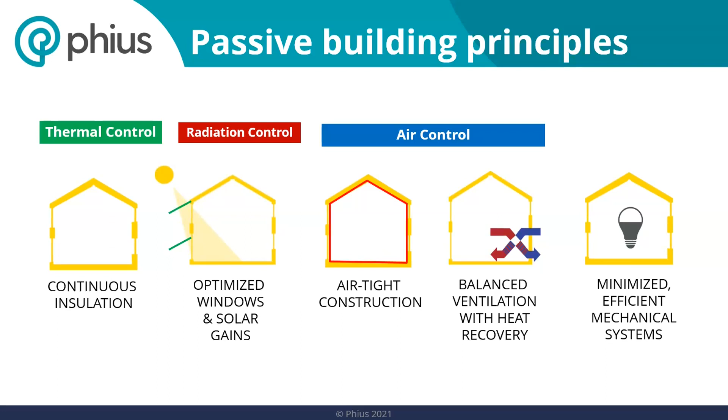So besides the quantitative pieces of passive building, which include energy reduction and those types of things that are going to help save money for the building and for the developer and for the people living in it, we also have some qualitative pieces. So comfort, interior health, safety, durability, resilience, all of these things are also delivered with our passive building standard as part of making our projects more energy efficient.

These are kind of the things that are less often talked about, a little bit harder to quantify, but very real things that are delivered to occupants. So going into our certification requirements, we have them split into two halves here. I've got it listing the passive conservation metrics and then the active conservation metrics. And there's a few of them listed here that I'm going to go through piece by piece to wrap everybody's heads around what we're talking about.

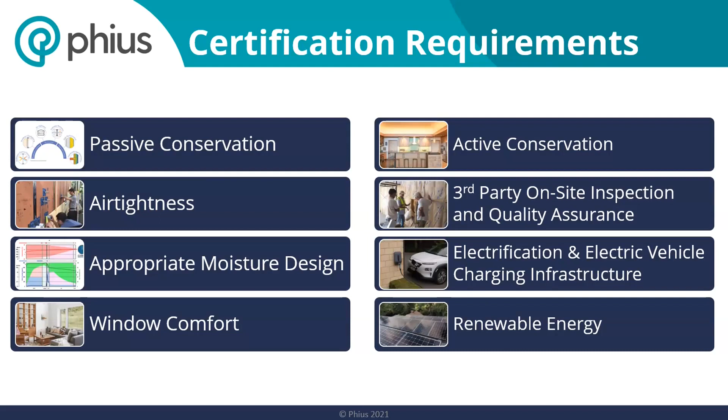So from a passive conservation perspective, we have heating and cooling limits that have been optimized for cost, energy use, climate, building type, occupant density, dwelling unit density, and we have a specific calculator that we use to determine what these targets should be.

And again, because they're optimized for all of these different pieces, we really feel like we have developed a standard that's really special and really works well, especially for the North American market, and it responds to not only the building type, so if it's a multifamily or a single family building, it also responds to occupant density and dwelling unit density.

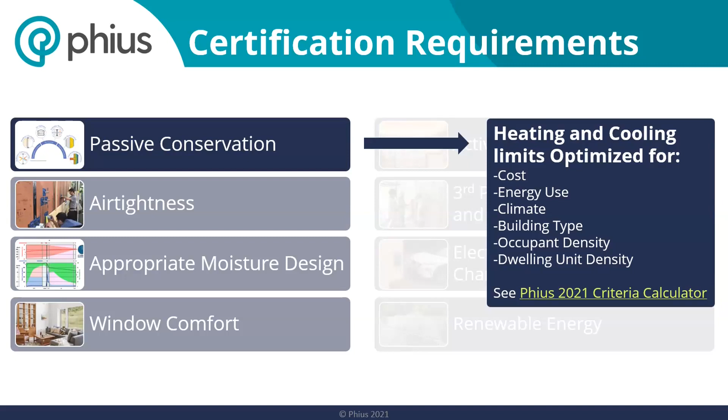So it's trying to take a look at some of these projects, which a typical market rate multifamily building could have a spread of studios, one bedroom, two bedroom, three bedroom apartments. That type of building might have a little bit different feel than maybe an affordable project that's all studios, where it's even more densely populated. So these optimized heating and cooling limits are our main metric through the passive conservation metrics that help inform how much insulation you need, how good of windows you need, et cetera.

Air tightness and moisture design, keeping those in line are critical for both building durability and occupant comfort. We have specific air tightness requirements that are tested on site and have to be met for our final certification process. And then moisture design is all about keeping the assemblies durable over the long lifespan of the building, not introducing moisture into the walls, making sure these buildings and their assemblies last as long as possible.

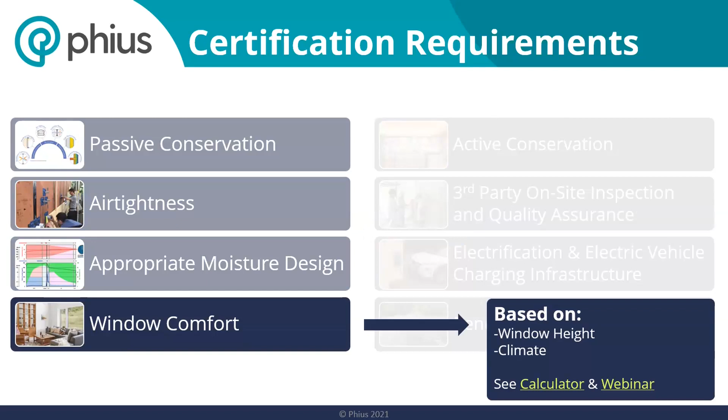Window comfort is part of the comfort criteria we have. It's based on window height and climate. So depending on where the building's located, we're looking at the ASHRAE 99% design temperature, and then how tall that window is informs this limit. So it's basically a maximum U value, or the window can be only so bad depending on the climate and the window height. So again, this is going back to one of our qualitative pieces that we've assigned a quantitative limit to, which is window comfort.

Our active conservation metrics are limiting the source energy of the project, or how much energy the building uses overall. For multifamily buildings, it's based on occupant density and dwelling unit density. And our calculator that I mentioned earlier also determines what this target should be. I'll talk a little bit later. We have two different certification paths. We have PHIUS Core and PHIUS Zero, which I'll go into a little bit more in depth about what this means in terms of the source energy limit.

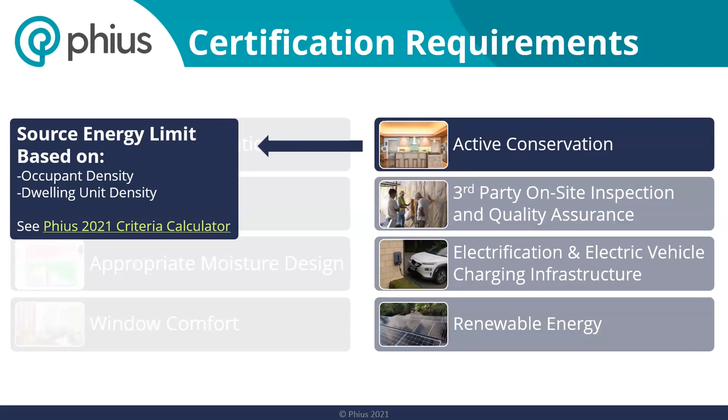Third-party on-site inspection and quality assurance is a really important piece of our certification process. We're relying on prerequisite programs like Energy Star, Indoor airPLUS, and Zero Energy Ready Homes to build off of some of the things that they've already developed, so that we didn't have to reinvent the wheel on these pieces that we find are very important to ensure the buildings perform well, and the on-site inspection and quality assurance is really designed to make sure that the owner, the developer, whoever's building the project is getting what they paid for.

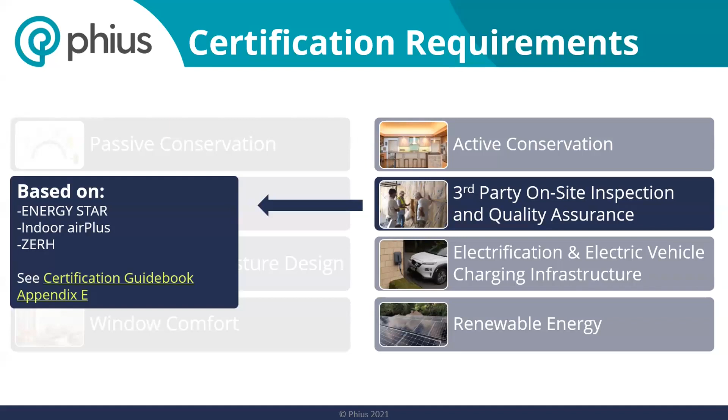So our certification guidebook has a reference here to all of these prerequisite programs and how we build on those with our program.

Electrification and electric vehicle charging infrastructure are two pieces that we've added to the PHIUS 2021 standard, which is our newest and most current iteration. We're basically trying to get as many buildings ready to be electrified as possible. So if you're doing any kind of fossil fuel combustion equipment, you are required to introduce panel space for an electric version of that equipment in the future.

And where there is parking planned, we require electric vehicle charging infrastructure to be either ready or available at some point in the future. So we're not requiring these things up front, but we do want to plan for the future. And those are definitely pieces that I think will be important with making our buildings last longer and making them more valuable over their lifespan.

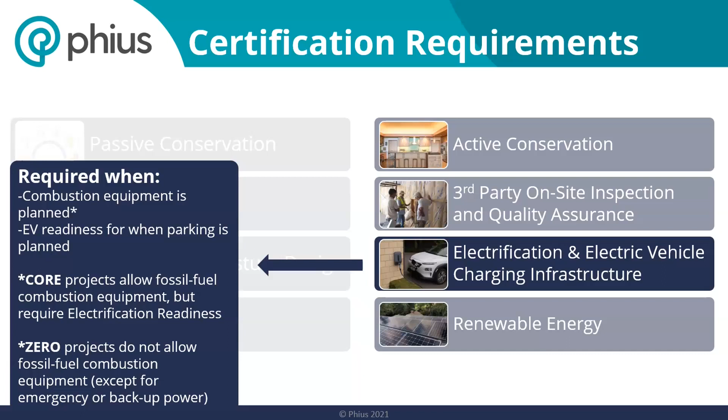The last piece is renewable energy, which kind of ties into all of these other parts that we've looked at. So we do allow renewable energy to help offset the active conservation and help meet the source energy target for our projects. We have a few options available for renewable energy. So we're looking at on-site PV or on-site renewables directly on the building or the site.

Looking at directly owned offsite, there's community solar options, virtual power purchase agreements, and then renewable energy certificates. All of these are options that we look to try and help not only the buildings perform better, but incentivize the grid to get cleaner as well.

So getting started, early on, we're looking at building a team, looking at the paths and the requirements. We kind of covered the requirements already. So from our perspective and the teams we're looking at creating, first and foremost would be a PHIUS certified consultant or a CPHC. They're really highly recommended. You want to involve this individual early. They take care of the energy modeling. They can help inform the design decisions, and they're our primary contact when the project is going through certification.

A PHIUS certified builder is also highly recommended. They're not a required piece of the puzzle, but if you can find a builder who is familiar and understands the goals of the project, they're going to be a really invaluable asset to the building and the success of the project. They help maintain quality and oversight and really ensure that the documentation provided is going to actually get built on site as it's expected to.

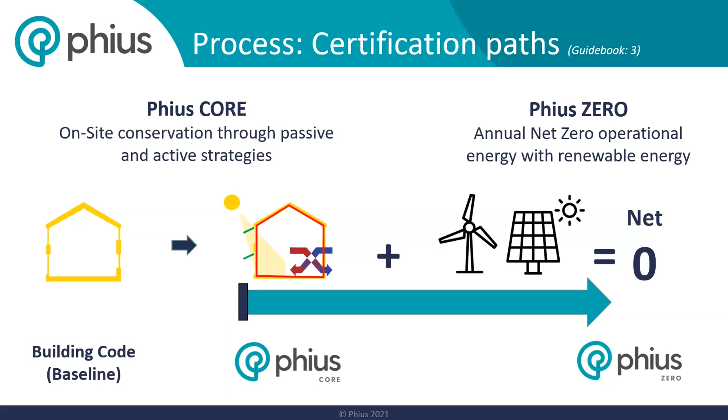The next stage I'm going to look at is a little bit more about the certification process in general. It is a two-part process. So we have design certification, which happens while the project is being designed. We look at an energy model to verify compliance that is reviewed by certification staff. And this process is iterative.

We're looking at and trying to help the project team develop the project throughout design development and construction documents. This isn't a process that we necessarily want to see after construction documents have been completed, because at that stage, if there are any issues with the certification design or anything like that, it's really difficult to change those types of things.

So we typically like to see projects earlier in design and then have the project teams check in with us and have us review their projects as it's being designed, rather than kind of a Hail Mary at the end and hoping that, okay, at the end, I hope we're going to pass.

The second half of the certification process is final certification. So this is the on-site quality assurance done by the verifier. PHIUS reviews their documentation, and then we align the energy model that was approved during design certification with any as-built changes that might have been made. So if we changed out an insulation type or stuff like that, we're going to pull in the actual blower door test results. We're going to see the actual ventilation values from the commissioning of the ventilation system. All of these pieces get reviewed and absorbed into the final energy model, and then final certification is issued after that.

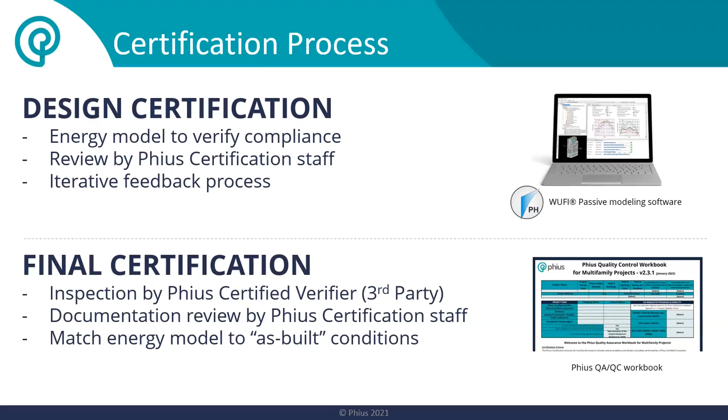So our process, we really like to recommend, it's an optional stage, but starting out with a feasibility study to determine if certification is worth it for the project. If you're in one of the communities in Massachusetts that's adopting the opt-in stretch code, this is something that definitely is worth doing. There are incentives for feasibility studies that they're providing. And this is basically PHIUS's snapshot check to help the project team, especially early in design, to see if certification is going to be indeed a path that seems reasonable and is worth it for them.

We create a preliminary energy model for your building design used to assess the current design, its feasibility to meet our performance targets. We try to keep these relatively inexpensive and try and have a turnaround time that's reasonably quick, so the project teams can make decisions early in the process. It includes an energy model. We've got preliminary reports about the annual energy use, and we typically create two cases when we're doing our feasibility studies through PHIUS. We have a baseline case, which would be looking at a code compliant version of the building, and then looking at, okay, what would it take in terms of improved R values, improved U values, better air tightness, et cetera, to meet the PHIUS targets.

And we always end these feasibility studies with a 1-hour call to kind of go through with the project team if there are any questions, going over what next steps might be, and then generally reviewing the findings that were done during the feasibility study itself.

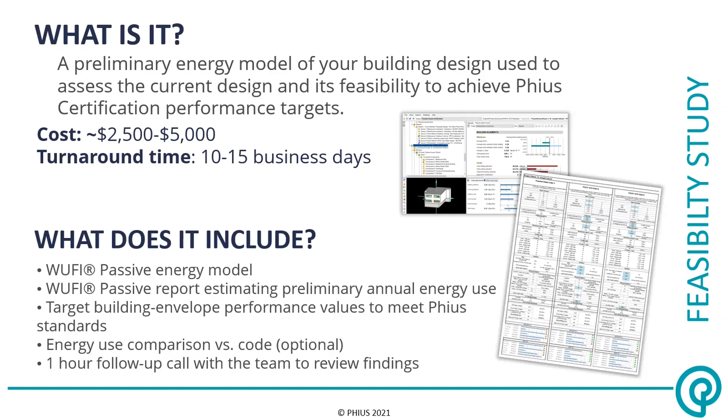Assuming that feasibility study went well and the project team wants to move forward, the next phase is paperwork and just getting the project registered. So this is a quote and contract request from our submit a project page. And the project is considered registered after the invoice is paid and the contract is signed. At that point, the project will be listed as registered on the PHIUS website. And you can move into actually the certification process, which is the design reviews, which I mentioned earlier.

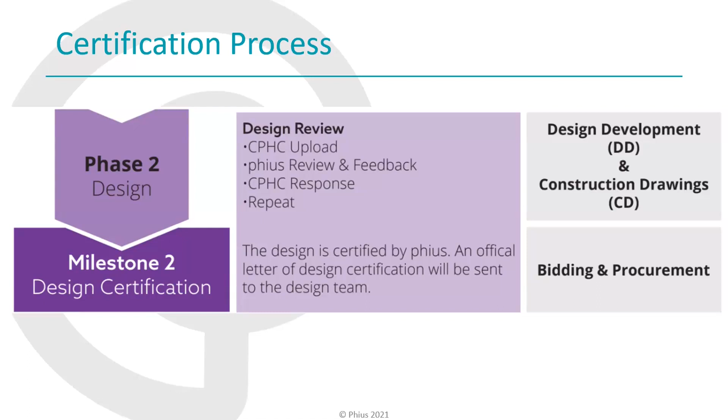So this part is where I'm going to go into a little bit more about what this iterative process might look like, what the things we require, some of them specific for multifamily. But in general, we're looking for the certified passive house consultant to work with PHIUS, upload documentation for us to review. PHIUS reviews and provides feedback. The CPHC reviews the feedback, makes any changes requested, gives more clarification and information, and then rinse and repeat until the project has been lined up and all of the documentation, the drawings, the submittals align with the energy model that was provided and is meeting the targets. After that point, design certification is issued by PHIUS, and an official letter is provided, and the website is updated to include a design certification date shown for that specific project.

So a little bit more about this design certification. We'll look at an overview of the documentation we look at. So compliance tool or the energy model, looking at the drawings, takeoffs, and submittals, talk about a few supplemental tools, and then we'll touch briefly on the PHIUS feedback form, which is the end all be all and basically where we track changes, where we track additional pieces of information that either need clarification or more info.

The pieces that build off of and we check against this energy model are drawings and takeoffs. So design drawings, obviously these typically come from the architect and the engineers. We need to see building plans, sections, elevations. We want to see mechanical, electrical, plumbing drawings, all of these things that make a building come together.

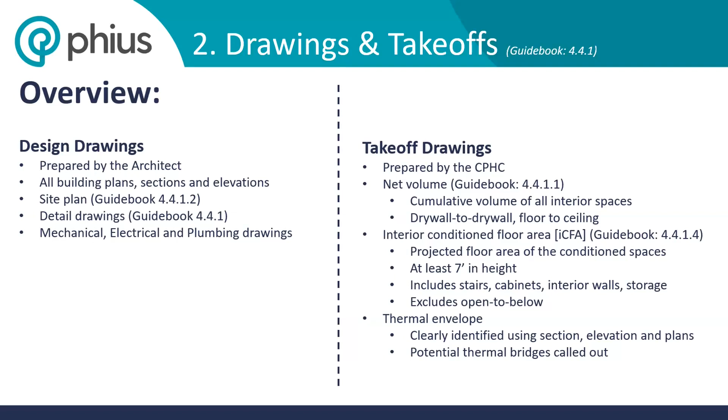Takeoff drawings are typically prepared by the CPHC, and these help us to basically tell quickly and not have to be on the actual design team when developing the building, and get the information communicated to PHIUS in an orderly and quick manner, so that we can double check and make sure that things look correct as they've been developed.

Drawings and takeoffs continued here. Detail drawings are a big piece of what we review during certification. We're looking here at trying to make sure that there aren't going to be obvious thermal bridges, trying to include that continuous thermal boundary as much as possible. This is also where we're looking to try to mitigate moisture concerns up front during the design, and trying to make sure that air tightness details look like they're going to actually perform in the site. So all of these pieces are critical when going through the design certification process.

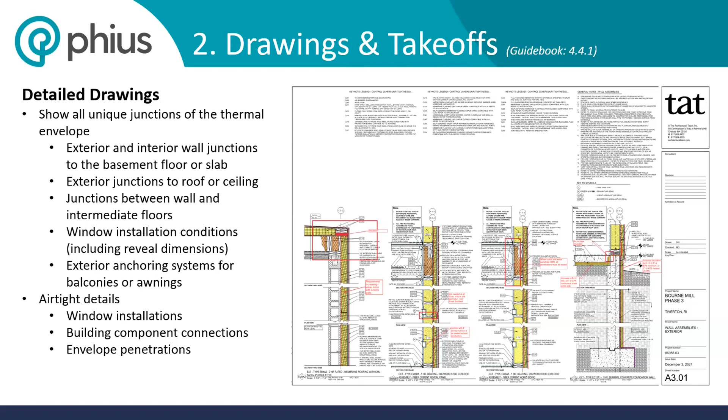And you can see, like, okay, if I sent all of these drawings 2 months after we've gotten permit and after construction documentation has been completed, that's really late in the process to be able to try to make any changes or mitigate any potential concerns that you might see in the field later.

Mechanical drawings are the next piece that I'm going to touch briefly on here. The main things we're looking at with mechanical drawings are what is the ventilation layout, making sure that the rooms that are being provided with supply of outdoor air and exhaust line up between the energy model and the drawings, making sure that the heating and cooling systems are sized properly and are going to distribute the heating and cooling properly, and making sure that basically the mechanical system as a whole is going to perform how we're expecting it to, and aligns with the energy model we're providing.

This is part of that active conservation piece, where the efficiencies of these systems have a big impact on the source energy of the individual projects.

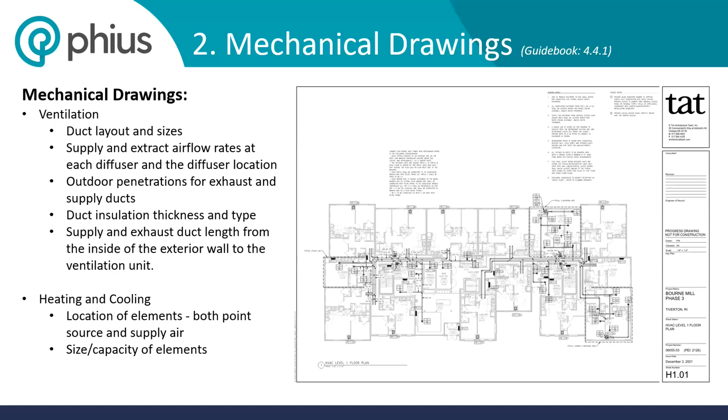Submittals, this is kind of the next piece. This is looking at basis of design documents. We want to know insulation types and basis of design for the heating and cooling equipment, for the ventilation equipment, trying to look at the critical pieces here, like windows, which are a big factor in all of our certified projects. We do have a list of certified windows on the product page on our website.

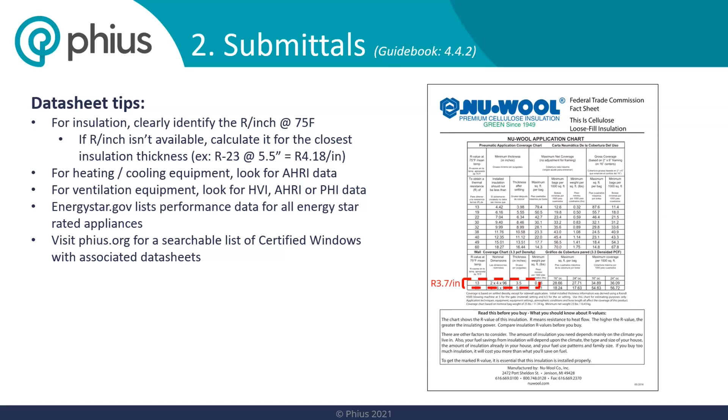And I think we're going to be launching our new version of this window database in the next month or so. So right now it's kind of a list, but in the future it will be a searchable, filterable list, which is going to be, I think, really helpful for project teams to go and find windows that might be a good basis of design during the certification process.

The next page is supplemental tools that we use and look at. Some of them are more specific for multifamily, but all of them are really helpful. So we're looking at a multifamily lighting and miscellaneous electric load calculator. This is a tool that we use to determine how much lighting and plug loads are going to be used in the building, which is helping to determine internal heat gains for the building and total energy use. We have both a calculator and a webinar available on our website at the moment for this specific tool.

The window comfort and condensation risk assessment calculator, I mentioned that earlier in the presentation as well. We have a webinar and a calculator for this too, which is helpful for helping to read that tool and make sure you're understanding the results.

We have a multiple heat pump calculator, which also helps determine derations when you have certain performance values given for air source heat pumps. We have a calculator available on the website, which is useful, especially for multifamily projects with a lot of outdoor systems, not just one centralized heat pump system.

We have domestic hot water distribution layouts and entries. There's a diagram and a webinar series that help CPHCs specifically to document the hot water piping network that's being proposed for the different buildings.

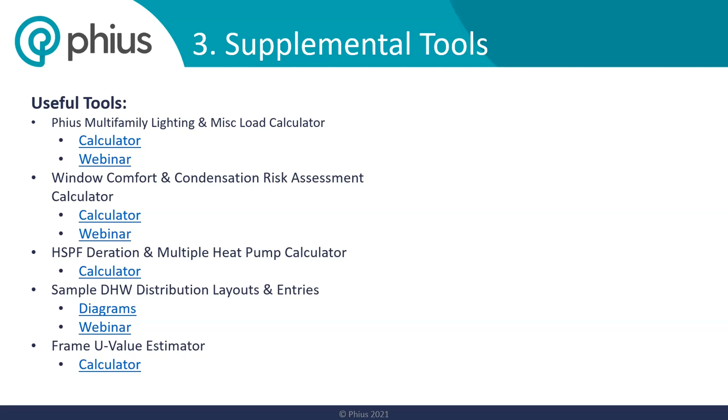And then we have a frame U-value estimator, which I'm flagging here as really helpful for project teams when they're working on a multifamily project that's got a storefront or something like that that doesn't necessarily have typical punch windows that might be listed on the window product page of PHIUS's website. But if you do have data from NFRC, for example, and then you can coordinate with the manufacturer and determine the glass type, this calculator is really helpful to pull out the granular data that we need for our energy modeling purposes.

In addition to those tools, we also use THERM, which is created by LBNL, to determine and quantify potential thermal bridges in projects. And then we can also use WUFI Pro, which is a hygrothermal risk analysis tool, which looks at moisture mitigation within wall assemblies.

We have prescriptive requirements to try to mitigate thermal bridging and to try to mitigate any hygrothermal risk, but every project is unique, and lots of times there are specific details that may not quite comply with our prescriptive requirements. So we have this option to use this performance path here, which allows you to create an analysis and make sure that there's not going to be issues in the long run for either of these situations.

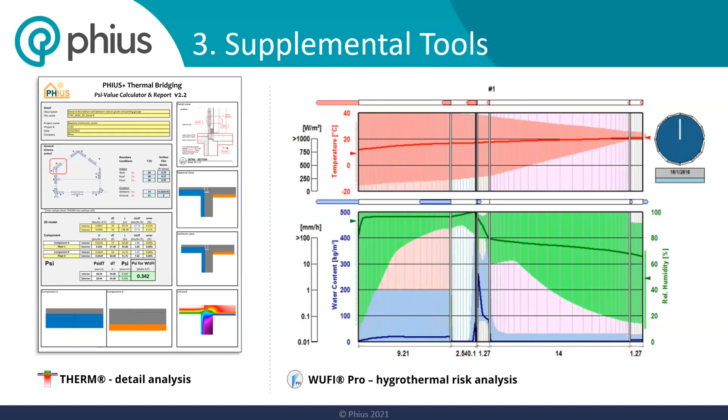The last piece I'm going to touch briefly on is our feedback form, our process. So this is an Excel file. It has all of the documentation reviewed line by line, and PHIUS approves and provides direction on all of the inputs within our energy model software.

We're expecting the CPHC to provide responses and give either additional clarifications or ask additional questions that they might have about comments that were previously provided, or things that the project team is dealing with internally and needs to get a second opinion on. So this feedback form is really what holds all of the information regarding the project and how we move it forward through the design reviews.

Talking about timelines for design certification, I think, is important to get people on the same page about what they can expect. Because our process is iterative, we do have different timelines for each round of review. Our first round of review would be submitted, and PHIUS will ensure that we get feedback within 6 to 8 weeks of that first round of review submitted. Second round reviews is 4 to 6 weeks after it's been submitted back to us, and then 2 to 4, and then 1 to 2 for every round after that.

Most of our project teams at this point in the multifamily sector are finishing their design certification within 3 to 4 rounds of design review. There are a couple stragglers that sometimes take a little bit longer, but typically that's what we're seeing.

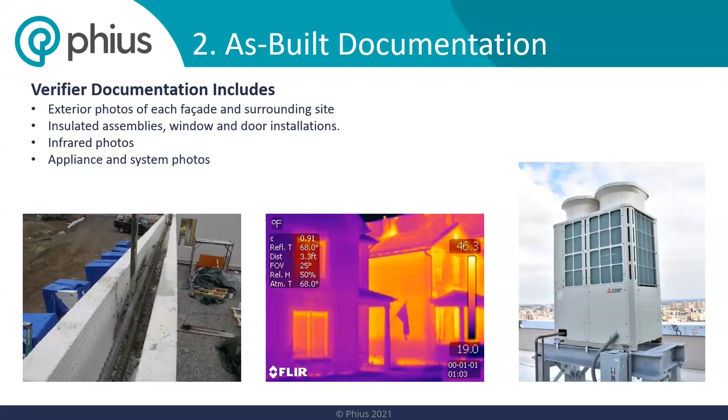In addition to this documentation, they're also responsible for conducting the blower door test. They need to be on site to view and participate in the commissioning of the ventilation and the heating and cooling systems. The verifier is a really, really important piece on site for these projects. All of that documentation, those verifiers are expected to distill into workbooks and quality assurance, quality control reports for PHIUS to review and kind of go through and look at what the building is in terms of these reports.

We have our qualifications, and our Appendix E kind of lists all of the scheduling recommendations, testing protocols, and definitions that the verifiers will need to review when they're going through this process. And then again, before final certification is awarded, we are aligning that energy model with the quality assurance workbook and whatever documentation the rater recorded that might have changed between design certification and final certification. Those examples include updating the final air tightness test and basically incorporating any other changes we might see during construction itself.

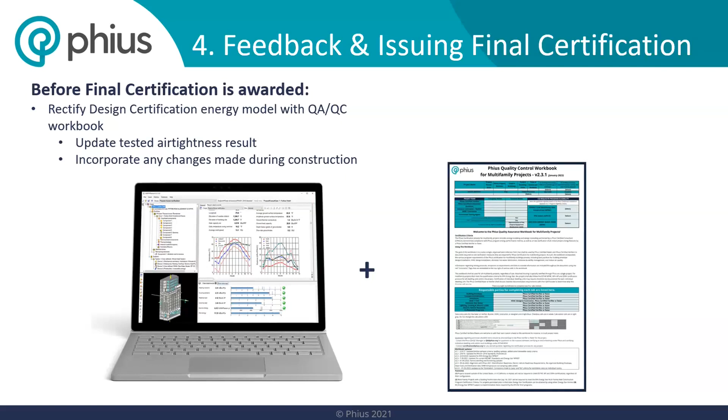For our review timeline for final certification, it's a lot faster. Again, there's not as much documentation to review because much of it is already set in stone, literally. So our document review, we basically look and see after the verifier has uploaded documentation, we respond within 3 business days to let them know if we see anything major that's missing or hasn't been reported to us. And then after that documentation review has been completed and we've confirmed we have what we need, we return our feedback for a full review within 1 to 2 weeks. And that basically kind of goes throughout until the project is fully certified.

Our typical time frame from when design certification is issued to final certification is about 16 to 24 months based on our historical data we have. And this is a long time, and it's because it includes construction time. So typically that design certification should be issued before construction is started, and final certification is after it's been completed and the verifier has gotten all of their on-site documentation together.

So for additional resources and trainings, we have a few of them. I know that Aaron has already mentioned a few, but we have trainings for consultants, builders, raters, and verifiers. Raters and verifiers are just two different pieces of the quality assurance process. Raters are typically for single-family homes, while verifiers are for commercial and multifamily projects.

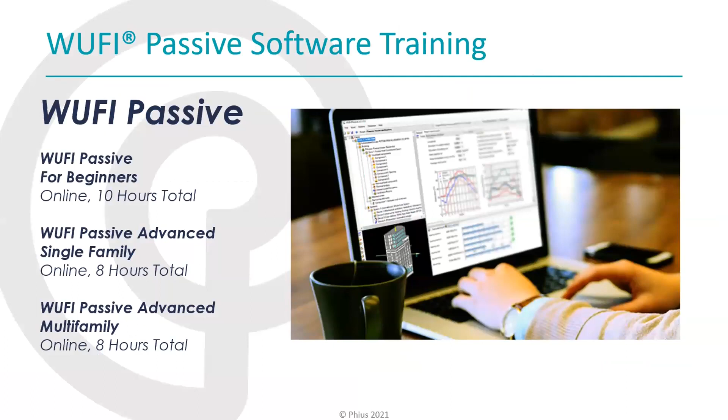Otherwise, we do have WUFI Passive software training. We have it for beginners, advanced single family, and then I'm going to highlight the advanced multifamily training that we have. It's an 8 hours total course. It's 2 days of live virtual training, and you're working with CPHCs who have done multifamily projects before as our trainers, and they can really be helpful not only in the modeling, but you can also ask them questions about their process for certifying and any insight they might have to offer from the perspective of the CPHC on a multifamily building in general.

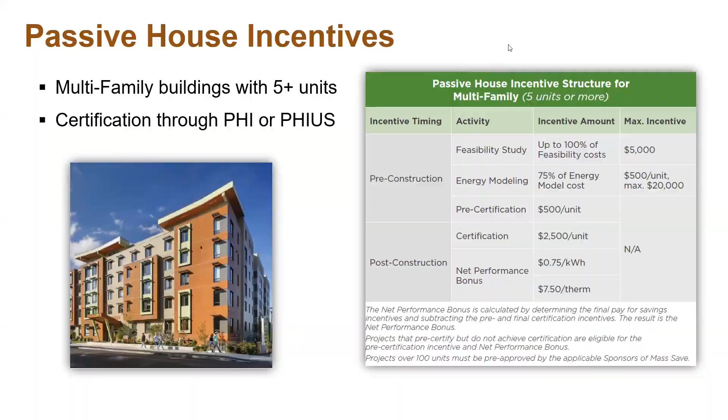Khan is asking, will you be running training on hydrothermal modeling in WUFI? I believe we will. We have not run one for a minute now. We do have that on the docket. I'll have to check with our training manager, Josh, to see when the next one of those is coming up.

In general, though, our hydrothermal guideline is listed on the website as basically the standard for how you go through hydrothermal analysis in WUFI Pro. So that is a helpful document, but obviously if you haven't used WUFI Pro, it would be helpful to do a training itself. So I will check with Josh. I'm not sure right now when our next option for WUFI training would be. I would just have to check the website to see upcoming trainings that are listed for the moment.

And I will say in general, hydrothermal modeling is complicated and helpful, and normally also kind of a last resort. We don't necessarily want to go into every project thinking, okay, I'm going to have to run like 4 hydrothermal analyses on this building. We really want to try to limit those as much as possible and use some of the prescriptive requirements that are outlined in the guidebook under Appendix B, which lists our hydrothermal prescriptive ratios to try and stick to and meet where you can to avoid that kind of assessment.